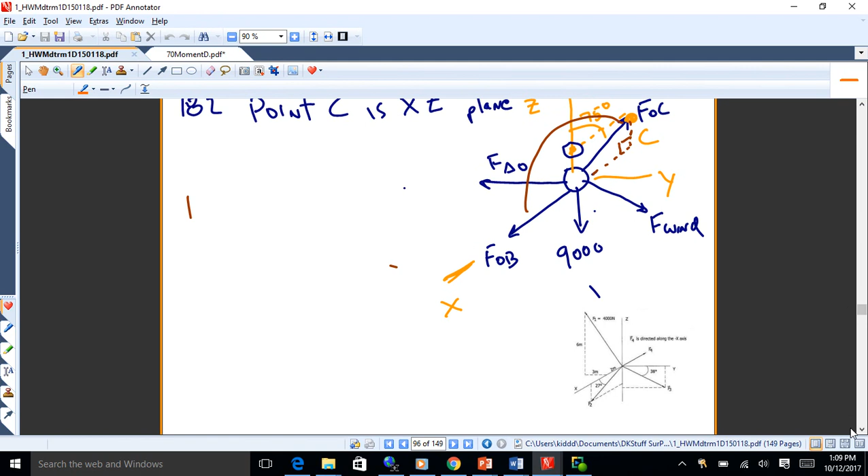Something that looks like this. Is it turned the other way on yours? It's kind of oriented vertically, right, the box? Yeah, okay. So all the old stuff is correct, except for the dimensions, right? Everything else, yeah, great.

So this is kind of a basic moment problem. It just covers a couple of ideas: one is that you use trigonometry to break down the force vector into x and y components, and also that you find the moments by combining the force and distance components. So you'll use fx and dy, and fy and dx, and then you add up the results. Finding a net moment is just an additive process—you just add stuff up to get the proper answer.

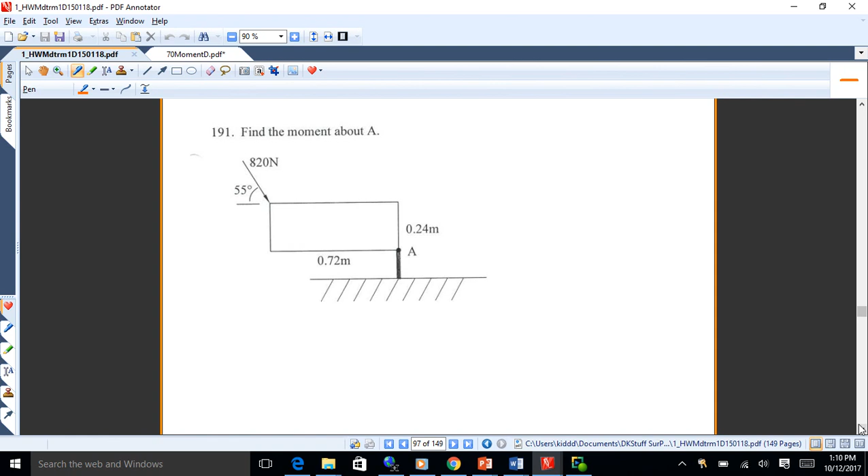Are there any questions on this thing? Actually, yours should be oriented this way—I changed this and just never got around to fixing it in my key. So 0.24 meters, 0.72 meters, and then we've got the force, same force, so 820 newtons at 55 degrees.

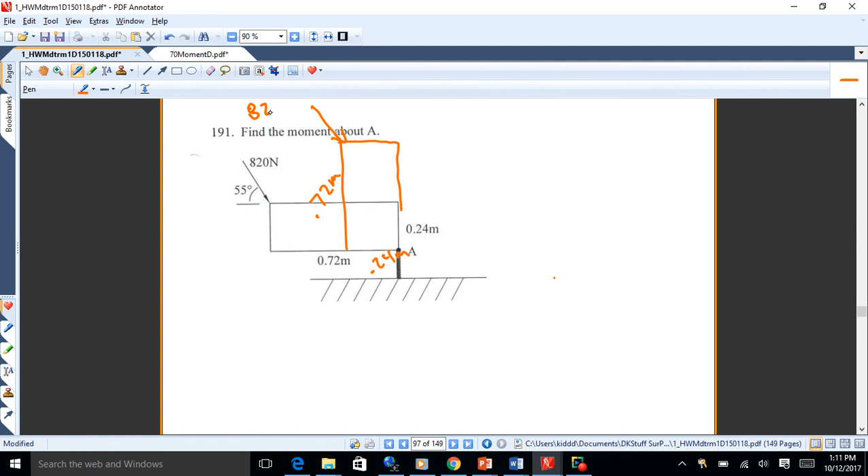So this is a lot like what we did in class. Any questions on that?

What page is that on? Yeah, page 97.

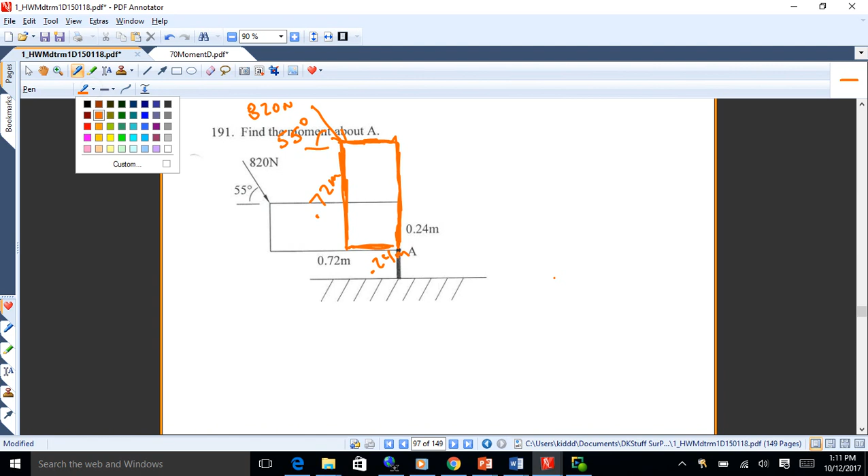So you just go sum of moments about A, and you'll break this thing down into components, then get that component, and then you'll get this other one, and you'll have to add them up—actually you're going to subtract one and add one and put them together to get the total answer. Should be negative 177 newton meters, I think. So when you work down through there, you should get sum of moments about A is negative 177 newton meters. That's one way to write it. You could also write it this way if you like.

Okay, we good on that one? Any questions?

On the test, how do you prefer us writing it—is it one or the other? Yeah, it's one or the other, I don't quite... I know there's always questions like that. I kind of like the way at the bottom, because it leaves no room for error at all—it just says it's this big and it goes this way, and it's completely unambiguous. But I'm not a real stickler on that stuff. Just show me clearly what you're doing and what the answer is. Should be okay.

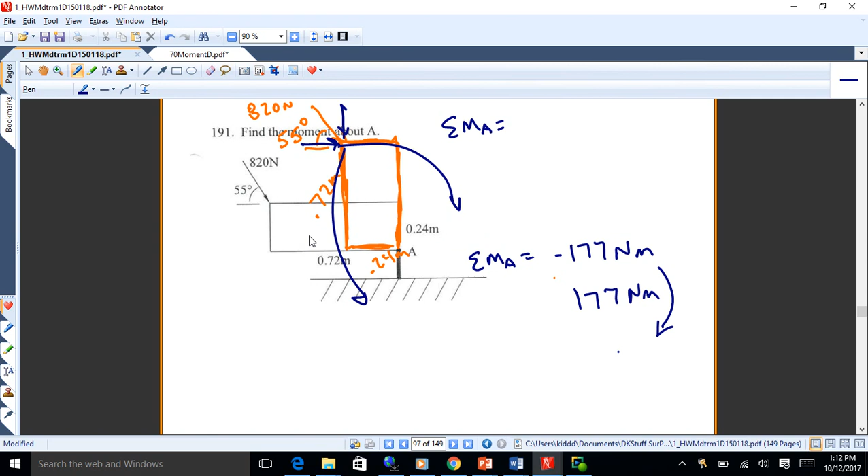All right, the next one is a little bit more advanced, you might say. Now we got two forces, okay? So what you want to do here is take these forces and break them down into vectors.

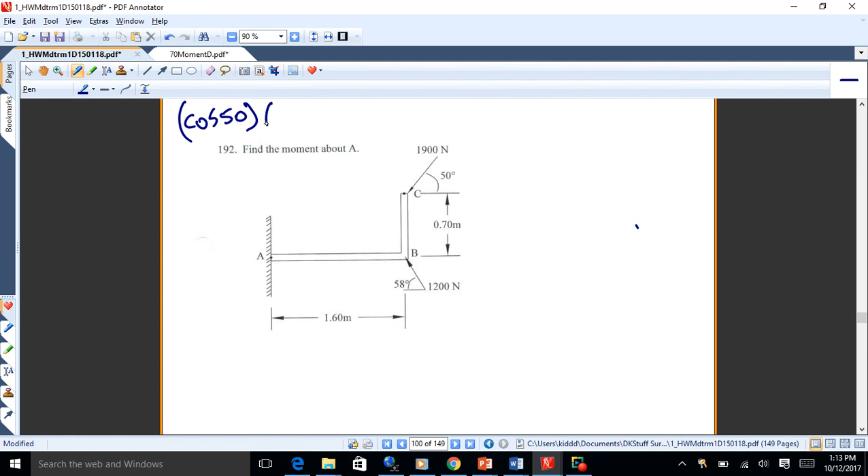So what you would do with that top force, for instance, is take 50 and use cosine and sine to break it into the two x and y components. So cosine 50 times 1900, and that's, I think, 1221. And then sine 50 of 1900.

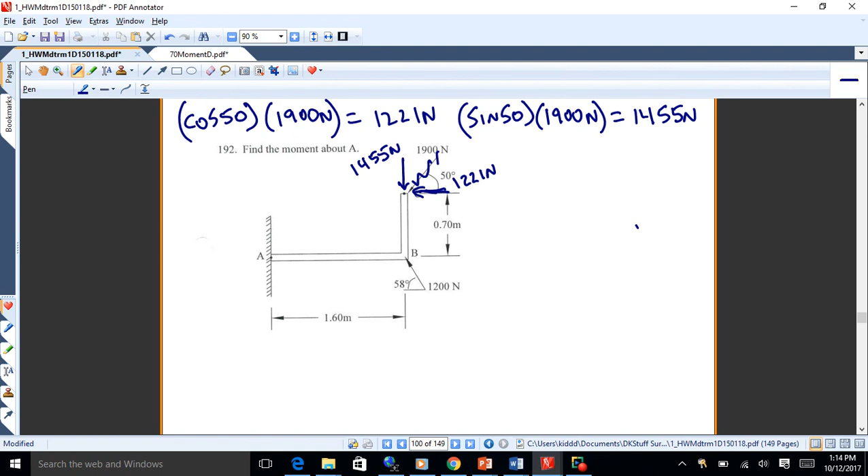So then what you're doing is you can take the two components and put them on there and replace the original force. I just go ahead and draw them on there if I need to, so it's nice and clear what I'm up to. That one's gone now, and you can do the same thing with this other one here at B, okay?

Like so. And then for a moment, you're going to go sum of moments about A, and sum of F. What you do here when you combine things for moments is you take X components of force with Y distances, and Y components of force with X distances.

Now those aren't dy dx like calculus, those are just distances. That's how you generate moments. So remember, you don't combine like components to get moments, you combine unlike components to get moments. That's kind of what a wrenching action is.

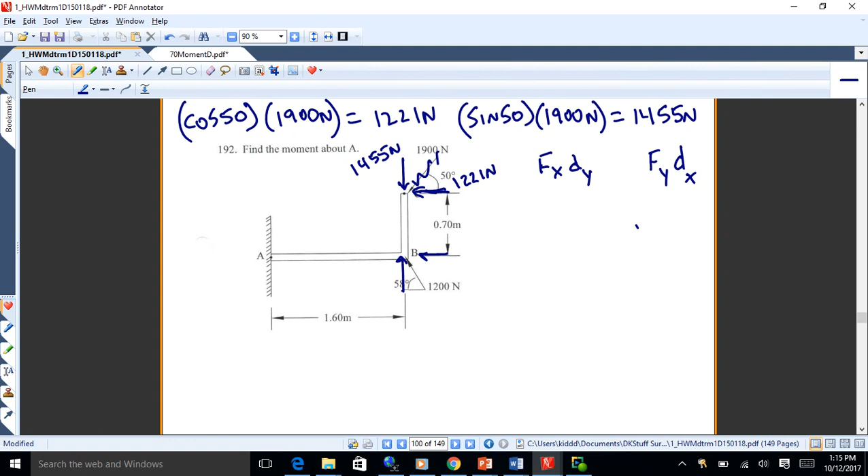When you push on a wrench, you're pushing perpendicular to the line of the wrench, right? So the force and the distance are in different directions. So what you can do with that is take the total moment about A.

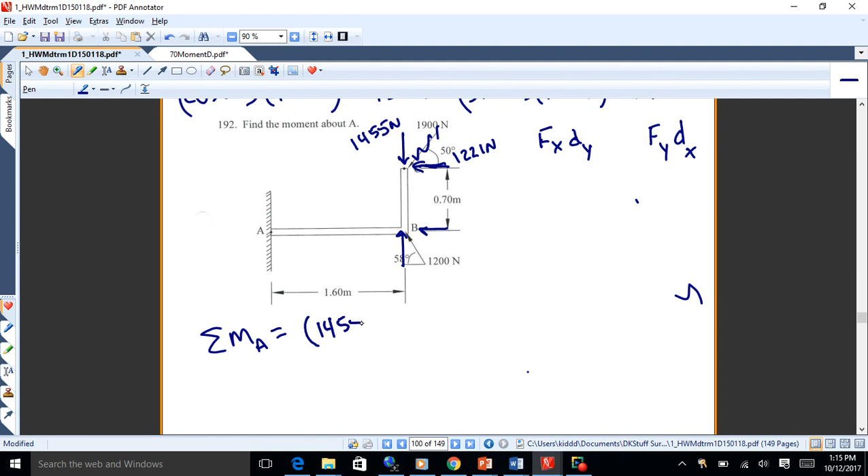And what do we got there? We've got 1455 newtons, that's a Y component. There's an X distance, 1.6 meters. That's going to come around this way. That's clockwise, so that'll get a minus.

And then you'll have the other one, and et cetera, et cetera. You just add all that stuff together. And what you ought to get is positive 154 Newton meters when you're done. Positive means the net moment is counterclockwise.

Yeah, question there? So is that saying that it takes 1455 newtons to go down basically to B, and then it'll go that way? So as far as rotation, I understand the idea behind the 1455 newtons and the 1221 newtons. I understand that those are the vector directions.

But is that what it takes to get from the very top to point B and then B to rotate? Well, you can kind of, let's see. What you can do, you can take a force and apply it anywhere you want along its line of action. That's the rule on that.

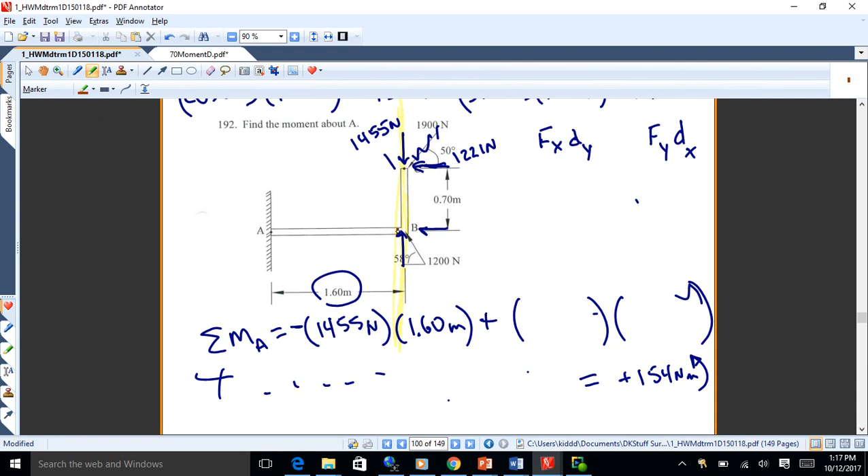So that 1455 acts anywhere on this yellow line. So I guess you could say you could put it down there and then combine it with this distance. That's really what's going on there. Does that answer your question?

Okay, so yeah, you can extend those forces and put them anywhere you like, also on their line of action, I would call it. Okay, all right.

And your intent there is to get distances that are perpendicular to the force. That's why I'm putting that one force down at B. Okay. Questions on that? Other questions? All right.

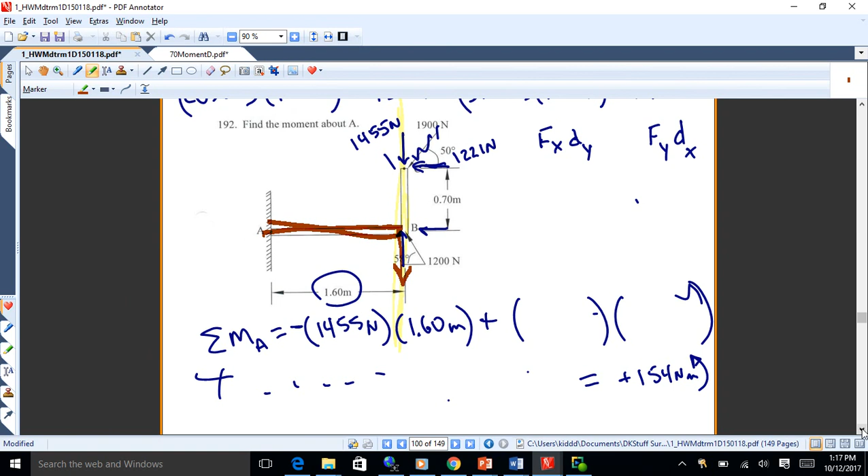All right, now this one is maybe a little trickier. It might be helpful to kind of do a little trick on this one.

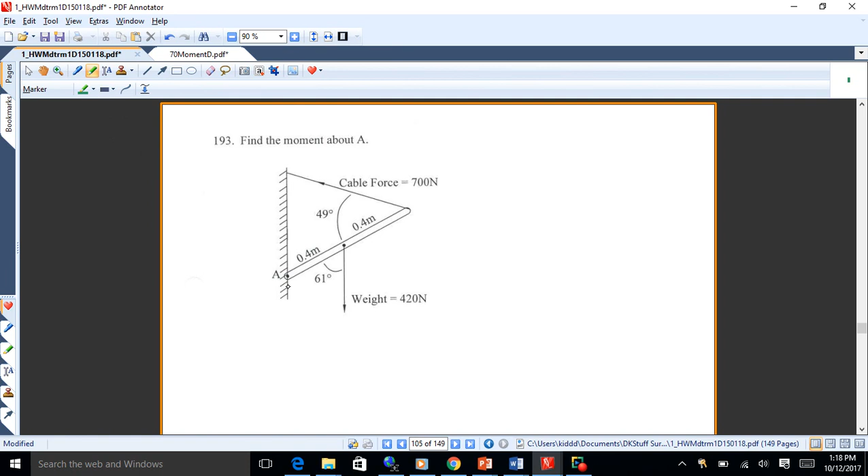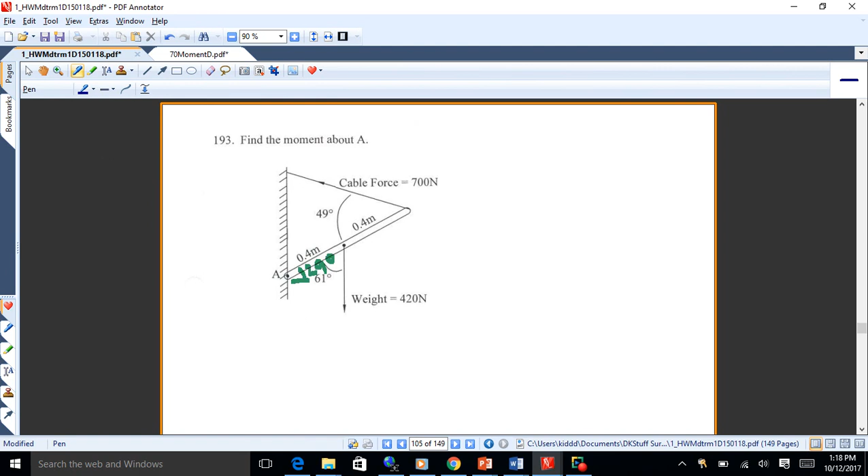Now, if you do this straight up the way that I was showing you, I would probably end up doing something like this. I'd figure out that angle there, which looks like 29 degrees to me, okay? So that's 29. And then I would find this distance by taking cosine 29 times 0.4 to the weight, okay?

So I'd do that. And then I would also find these two distances, and I didn't draw that quite right, but I would find these right angle distances, x and y, to get from A out here to the end of this rod. And then I would take the cable force and break that up into components also, something like that.

Okay, now that's a bit of work. I mean, it's not that bad, but it is a little bit of work. And I think there's a little bit quicker way to do this, so why don't we look at the quicker way to do it.

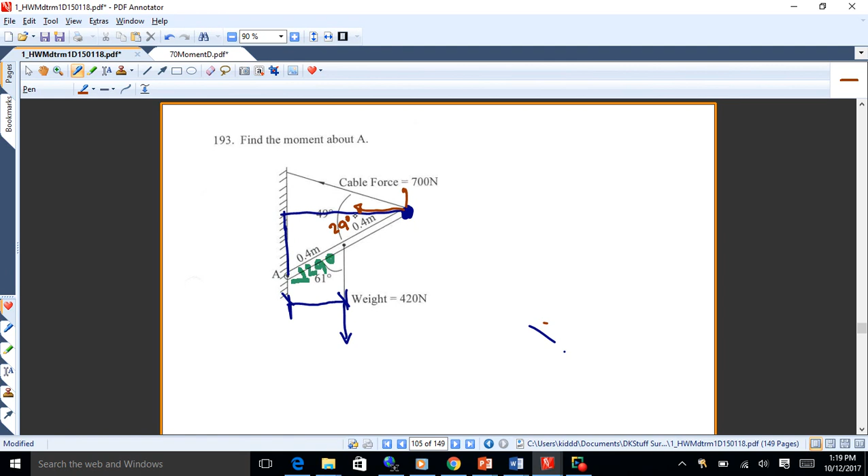What you'd have to do here on this also, in addition to what I'm showing, is also do parallel angles there, and that's 29 degrees, right? So that would leave 20 up here, wouldn't it? So there would be a little bit of messing around on that to get everything lined out and figure out what that net moment is.

There's a quicker way to do it. Okay, so why don't we look at the trick on this one?

Yeah, you want to spin your axes on this a little bit. So what you want to do is orient your axes along that rod. I think it would be a lot easier if you approach this problem like this.

X and Y. You can always orient your axes as you wish, okay? There's no rule that says they have to be horizontal and vertical. You'll notice that those angles you're given lend themselves to doing this. It works well with the given information.

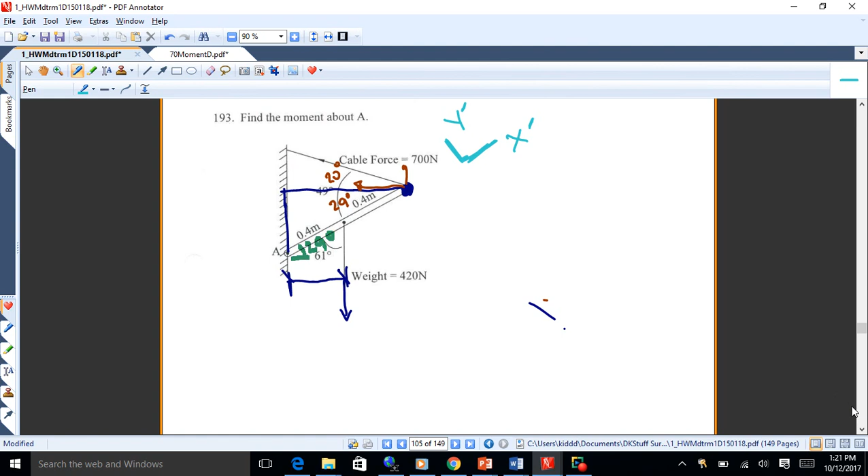So if you do this, you've got the distances along the x-axis, and then the angles that the forces make with that x-axis. Why don't we call it x prime, because it's not the usual x-axis. So x prime and y prime. You got the distances right along the x prime axis, and the angles from the forces to the x prime axis. So you can do a bit of trig and get that worked out along the axes. That's how I would approach this one. It's just quicker and easier.

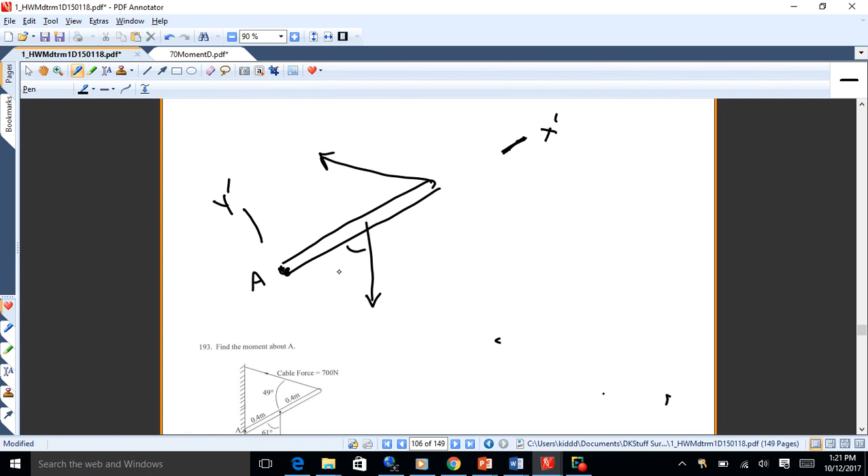So that's going to be the x prime axis, like so, and then you'll have a y prime axis like that. And that's point A. Then you've got the weight, which goes directly down, and the cable force like that. Now what you've got here is 61 degrees and 49 degrees, right? And then you've got 0.4 meters and 0.4 meters. So that's what you're dealing with there.

So what you could do now is take those forces and break them up. I would break this force up into an x prime component and a y prime component like that. So, the x prime and y prime. And then I would take the other force, the weight, and break that into a y prime and an x prime force like that, okay? You all okay with that?

Now you've got the angles to do that very quickly. You don't have to do any of the figuring out the angles like I did a couple minutes ago for the standard XY axes. And you've got the distances measured along the x prime axis, so you're pretty much good to go. It's pretty straightforward to do this.

The other thing happening here is that will not cause a moment, right? That has a zero moment arm, as does the other. So a lot of that stuff just cancels out because it goes right through A. If you push on a bolt, you don't spin it, you just push on it. You need the offset to create a torque, a spin, a moment, whatever you want to call it, okay? So those two cancel out, so you only have to deal with two components.

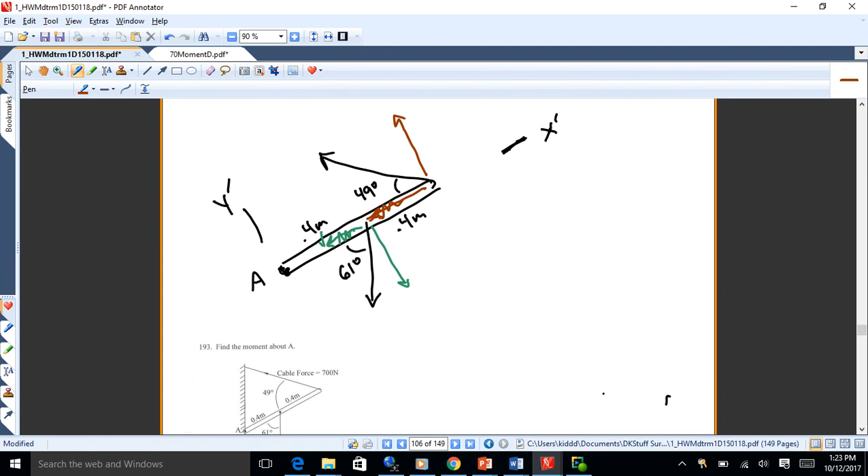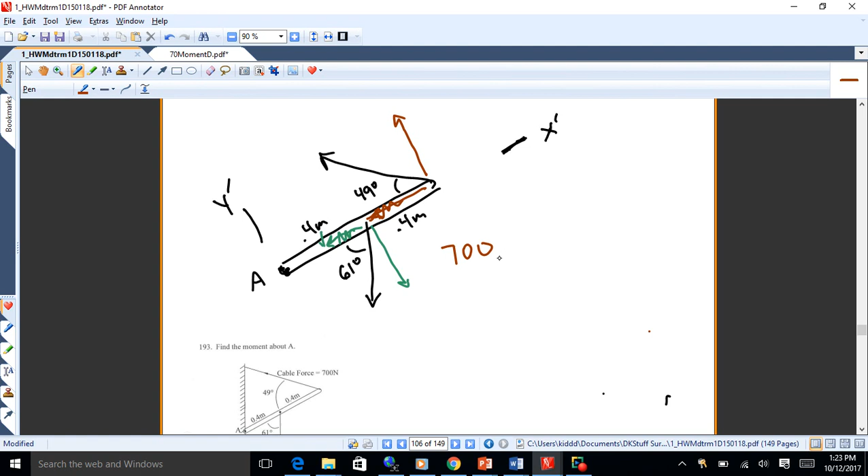And then you know the magnitudes of these things, so you could go 700 newtons, sine of 49, right? That would be the component you'd want. And then, what's the moment arm on that from A? It's 0.4 plus 0.4. Is everybody looking at that, is that a plus or a minus on that one?

Now, if you ever got doubts on signs, just check it out, you know? Like that, and push on it. Sure enough, it's going - whoop - guess I'm going the wrong way. Here we go, I'll do it from my perspective. So that one is going counterclockwise. So you can always, if you ever got doubts on signs on moments, just get a pencil or a little block, an eraser or a credit card or something, push on it, see what it does, tell that way.

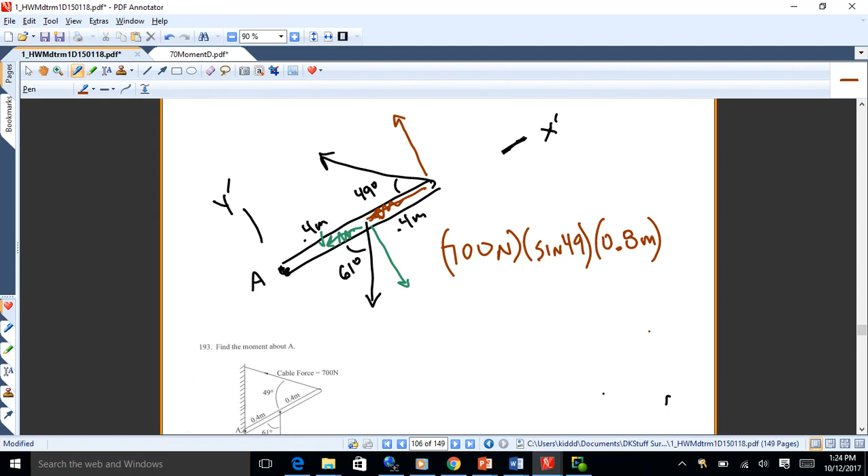Okay, so that's positive, and then the other one will be negative, won't it? So you've got one other, and then you do the deal on that, add everything up, and you get 276. So that's how I would approach this, and this is a nice little trick to know about. Every now and again, this can be a handy way to do something. Could save you a bunch of messing around.

So we doing all right with that? Got any questions? Do you want your answers in positive and negative, or in counterclockwise or clockwise? It's not a huge deal. I'm used to positive, negative. CW and CCW, I might have to look at for a minute. So just plus or minus probably works better. Or like I say, you can just put an arrow on them too if you like. That's fine.

Okay, now you good with those x prime components being zero for a moment? All right, as they push right through A.

And then the other thing is there's no direct connection between the sign on the force and the sign on the moment. Sign on the force is up, down, left, right. Sign on the moment, I don't worry about the sign on the force. I just look and ask myself, does this thing cause the object to spin clockwise negative or counterclockwise positive? So don't try and put the sign on the force that you put into the equation. That messes things up.

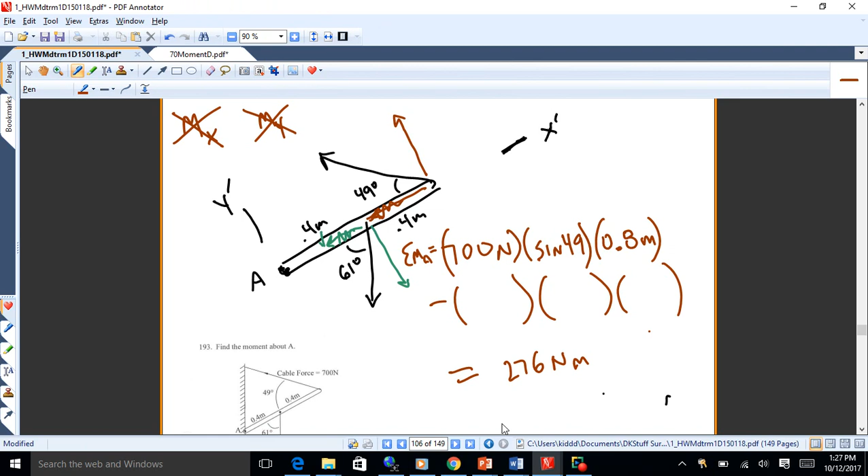Okay. We okay with that? We got any questions on that stuff? All right. Okay, we're good.

Okay, why don't we look some more at 3D moments here? This is the last topic that'll be on the test, this moment stuff. We'll probably have it finished by tomorrow.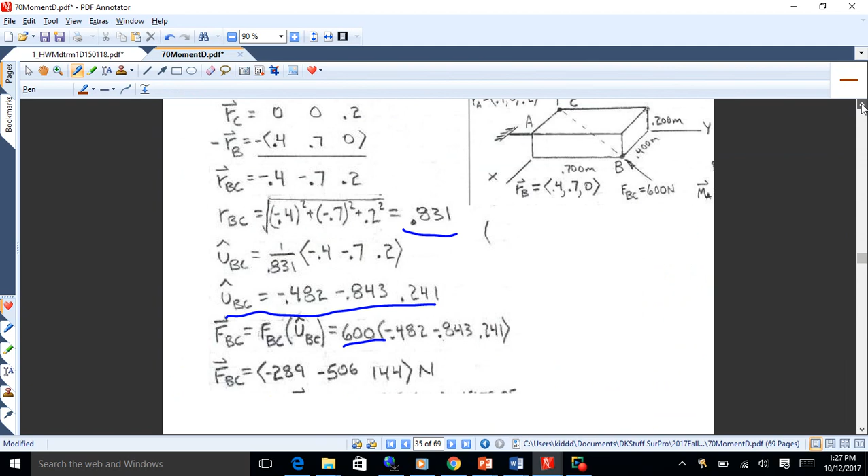So this 3D stuff, it gets a little trickier than the 2D. In 2D, I just use trig and combine stuff and look at it and figure it out in that fashion. 3D is a little bit more formal, or I don't know quite what the right word is.

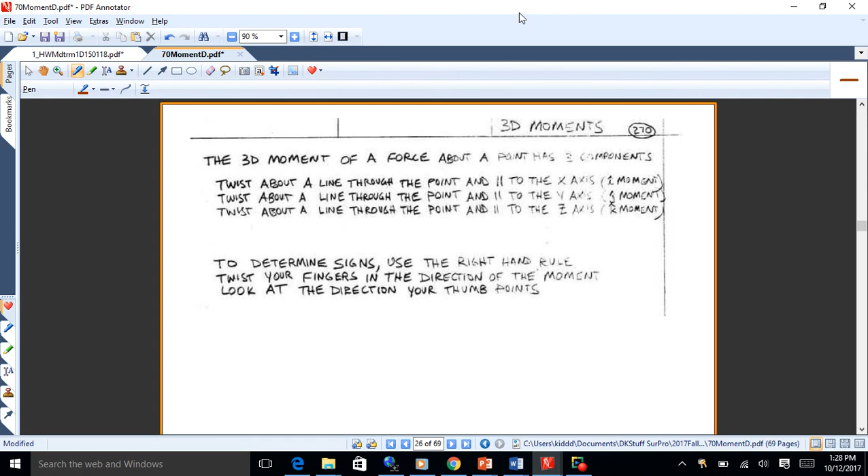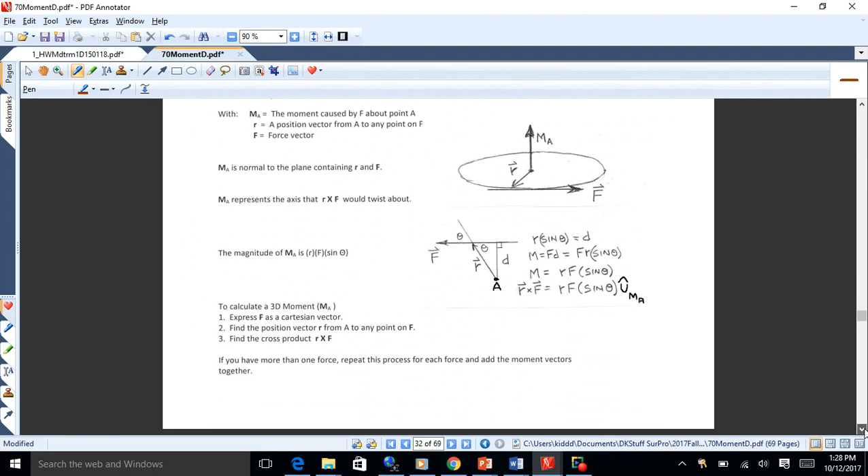But the first thing is you name moments after the axis they spin about, okay? So an X moment is a moment that twists about a line parallel to the X axis. That's what an X moment is. So all 2D moments are Z moments because they all twist about a line parallel to the Z axis.

So I think of the moment as being a wheel and the moment vector as the axle of the wheel. If a moment is spinning in the XY plane, which any 2D moment is, that's the wheel. Think of that little arrow you draw as being part of a wheel. The axle of the wheel is normal to that wheel, always. I mean, that's how axles work. So the moment vector is the axle. That's how I remember that, okay?

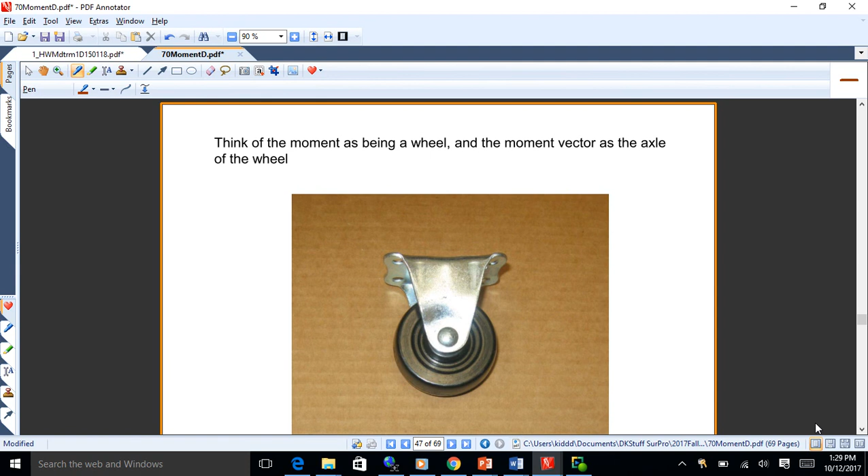So when you're doing 3D moments, you've got twists about a line parallel to the x-axis, twists about lines parallel to the y-axis, and twists about lines parallel to the z, and those are your three components of moment, X, Y, Z, which are designated by the unit vector components I, J, K. Right? So that's how those are called out.

All right, now the theory behind this is you look at how these things spin. We were working on this problem here, we did it visually. So we took that vector from B to C and we put it at C. We broke up the force vector into its three components, and then we started looking at it and trying to figure out how that force would push point C about A. We looked at each component individually and we combined those three components of force with moment arms to get the net moment about A.

And we did different visualization approaches to accomplish that. We did like a rod from A to C and looked at how the push at C would rotate the rod about A. We also looked at the edges of that box as being like hinge lines and looked at how those components of force would push a door along those hinges. So the hinge lines are along the axle, they're along the line that points in the proper direction for the moment vector for that component of force. Okay.

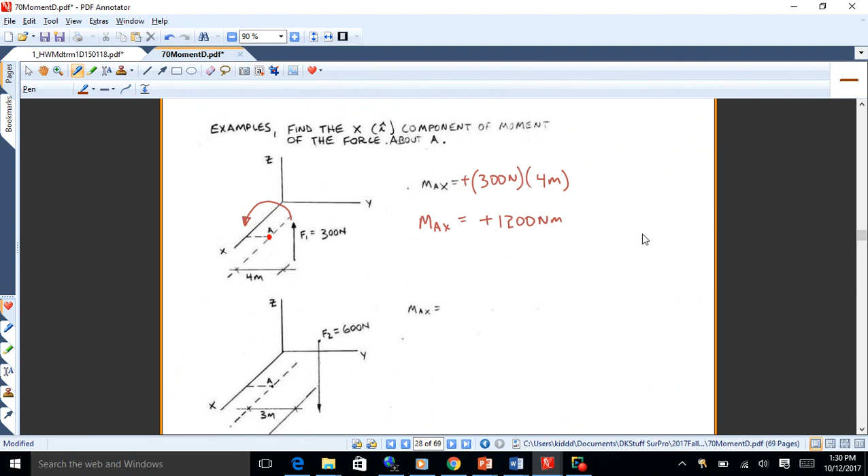We also realized that when you create a moment, you combine three components together. The subscripts on the force, the distance, and the moment itself always take up the three axes, X, Y, and Z. So in that example, we've got a Z force, a Y distance, and the moment is an X. That's not a coincidence. The three of them will always combine to get you one X, one Y, and one Z. Keep that in mind—it might help you combine the right force with the right distance.

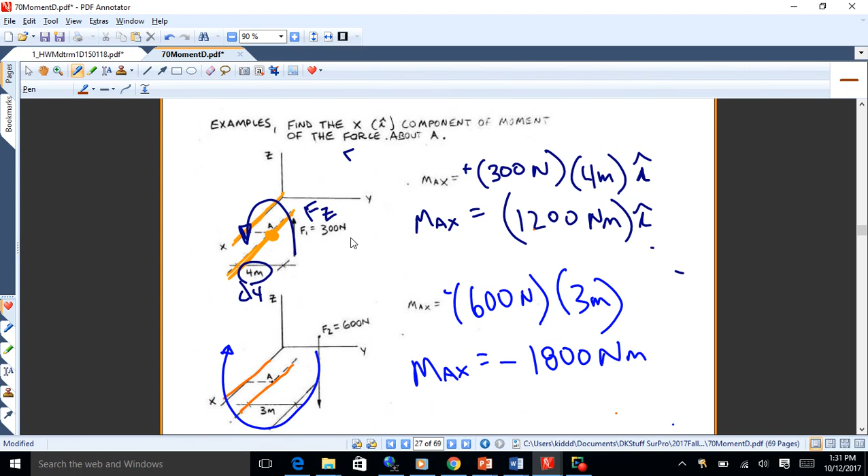They have different signs.

And then we looked at this and kind of figured it out. As is always the case, everyone squints when they look at this and tries to visualize, and some people get a little cross-eyed. This can be a little challenging to figure out. Typically I've found some people have this innate ability to see stuff in their minds, and some people have less of that ability. That just seems to be how it is.

We're doing all right with that? Any questions? Okay.

Did you move that point to a different spot? I'm trying to remember what you did. You said you could move that point anywhere on the line of action. The BC force? Yeah, I put it at C because it was easiest.

Why is the X component 0? Wouldn't the upwards part of the force vector cause a moment? So the 144? Wouldn't that cause a moment around the—when I put it at C, it doesn't, because it's right on the x-axis, right above the x-axis. So when I put the force at C, the 144 just pushes straight up. All that does is spin that way and cause a twist about the y-axis.

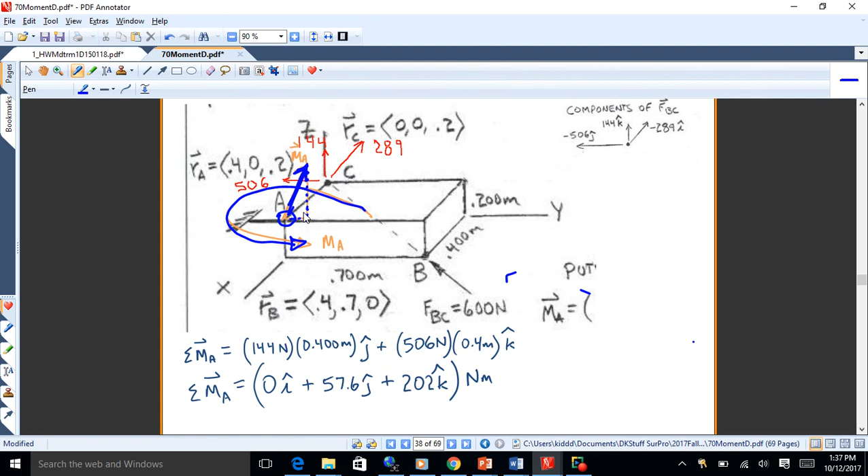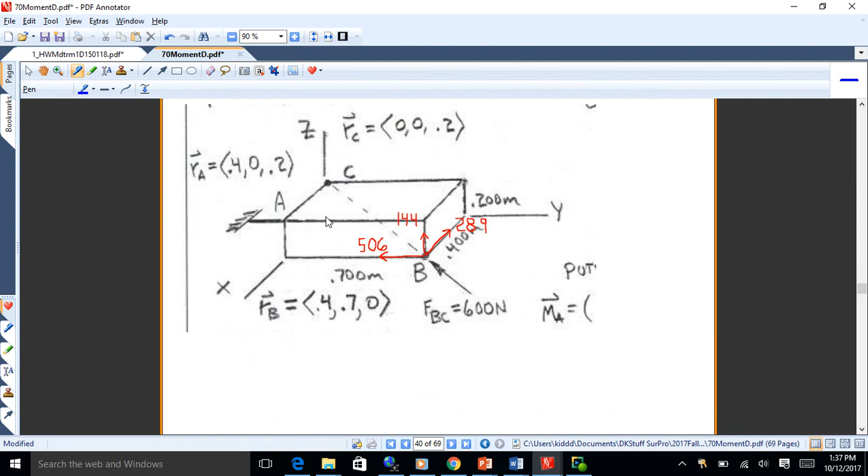All right, now let's do this the hard way. Let's put the force vector at B this time. Now this one's going to get a little bit messier. My goodness, okay, let's have a look. All right, now I'm not going to spend forever on this, but let's just look at what this stuff's going to do.

Okay, how about that 506? What's that going to do? It's going to cut under A, isn't it? And then it's going to push like so - cut under A, and then wrap around A like that. You all with me there? So think of that as just extending that thing out there. It'll go under A, and then it'll wrap around A, okay? So what type of moment is that?

Negative, yeah it is negative. What's the subscript on the thing? Remember, it twists about - what axis does it twist around? X, yeah, so that's an I. What's the moment arm for that? The distance - yeah, 0.2 meters, okay?

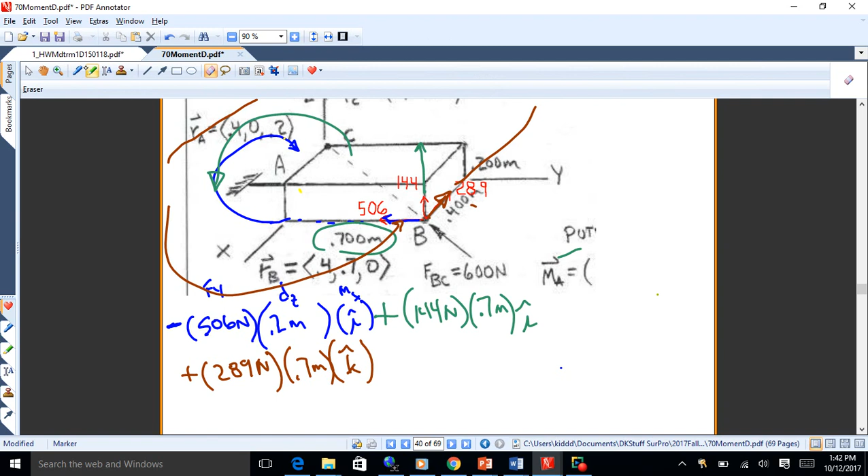Yeah, it does. And what does it do there? There's just different visualizations you can do on this, and I don't know quite what the magic answer is on this one, but it kind of goes like that, doesn't it? Think of hinging this axis here that goes through A like that, it spins that door.

And what's the sign on that one? Yeah, positive, so that's 289 newtons. And what's the moment arm on that one? Yeah, 0.2 meters. That's a K also, okay? No, it's not a K, I'm sorry, I'm screwing up. Yeah, that's a J, my bad. J, there we go.

Now this stuff, some people could just go, yeah, I see it. Some people got to work at it some more. I can always tell looking around, some people just see it, some don't. It's okay if you don't, because we got a slicker way just to knock these things out without having to look at them and squint so much and twirl our fingers around. There's other ways to do this, but that's what's happening there.

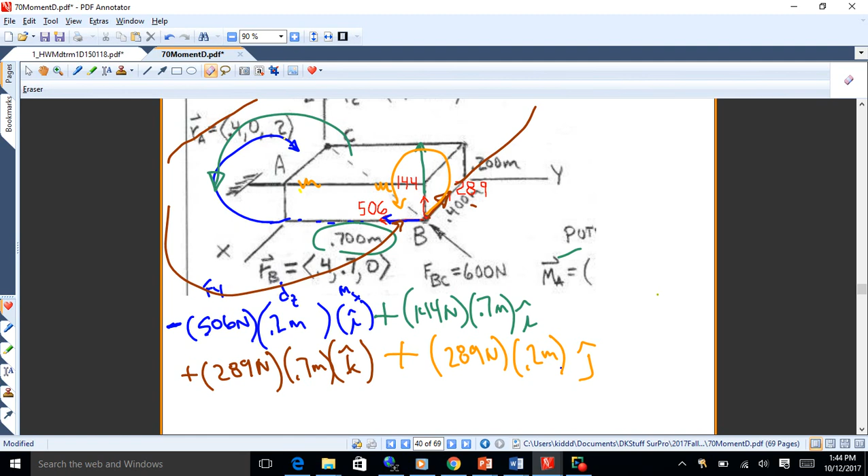So when you combine those three things together, you get something like that. And that resolves to the same answer that we had before, same moment vector. So it really doesn't matter where you put the force, it'll work out. Now, if I were doing this, I would put the force at C because it's the simplest way to calculate the answer, but you could put it at B or any other point in that line of action. Things will cancel and it'll just work out. The moment is what it is, and wherever you put it on that line of action, it'll work out.

All right, so you could do it wherever you want to put it, okay?

Yes? I don't get why that works out, because if you were to put it, like it's supposed to be on the line of action, like along A. The line of action doesn't go through A, I mean, it goes past A over here. I'm just saying, if you were to put that up a little bit, this motion wouldn't even move it. Yeah, but there would be, you'd move it in and out. No, you can't, you move it all directions at once when you follow that line. So if you don't get a certain action from what you got here, you'll get some sort of compensating action from a different dimension.

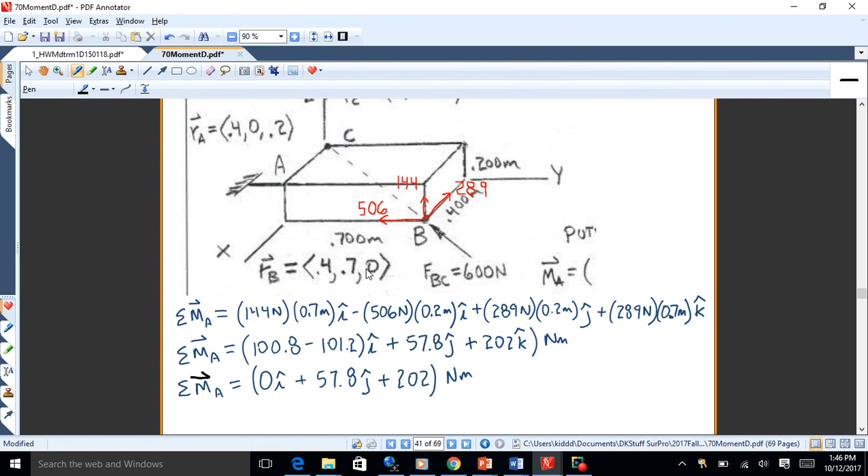Not the best I got. Okay, so that's the root of this—that's really what you look at. Now, this is kind of hard to do though, and it's not reliable. It's easy to make mistakes.

So once again, the mathematicians come to our rescue here. They came up with this thing called a cross product. If you're in 254, maybe you've had this already. If not, some of you don't even take 254, so I give you the cross product and put it right on your formula sheet. So the easiest way to do moments, and the way I'd suggest doing them, is using this mathematical operation called a cross product. I don't know why mathematicians came up with this—maybe it was to do 3D moments, I don't know—but somebody just came up with this thing. So a cross product, you cross two vectors, A and B, and you get a third vector, C.

So a dot product gives you a magnitude, but a cross product gives you a vector. The magnitude of vector C is the magnitude of A times the magnitude of B times the sine of the angle in between. C is normal to the plane formed by A and B, and you use the right-hand rule to determine its direction. You take your fingers, point them in the direction of A, curl them towards B, and your thumb points in the direction of C. So C has a magnitude of AB sine theta, and a direction that is normal to the plane of A and B, determined by the right-hand rule.

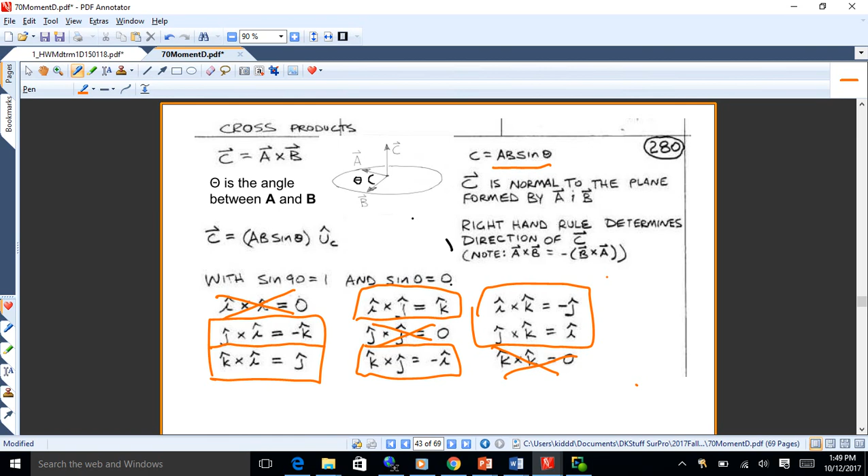So the like vectors go to 0 when you cross them; the unlike unit vectors go to another unit vector. So let's say we've got x, y, and z unit vectors: i, j, and k. If you take i—point your fingers in the x direction, curl them towards y—your thumb points in the positive z. So i cross j is a positive k.

Point your fingers in the direction of i, which is the x-axis, curl them up towards z—your thumb points into the page or into the board. So i cross k gets you a negative j, et cetera. So when you cross unlike unit vectors together, you get the results shown. You always have all 3 unit vectors represented in that equation, and half of them are positive and half are negative. So here's ijk, here's ijk, et cetera.

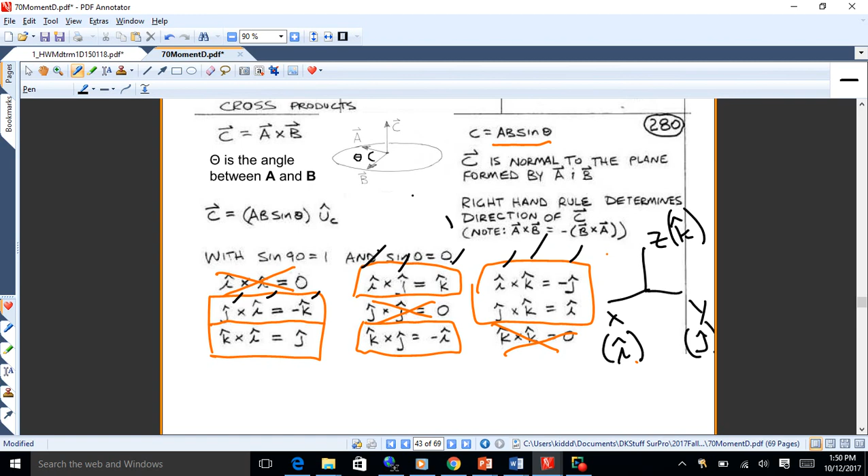Now, if you take vector A and cross it with vector B, you take every term in A and cross it with every term in B. So you end up with ax·bx, where i cross i is 0; ax·by, where i cross j is k; ax·bz, where i cross k is negative j, et cetera. Combine the terms together, and that's how you do a cross product. That formula is on your formula sheet. I learned to do it using determinants—you might have learned it some other way. However you do it is fine. You've got the formula for it on your formula sheet. It's a thing we'll use to do moments with.